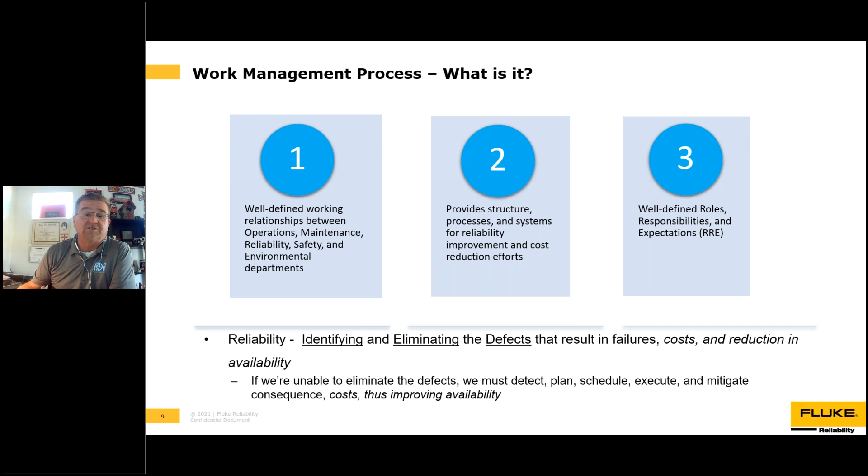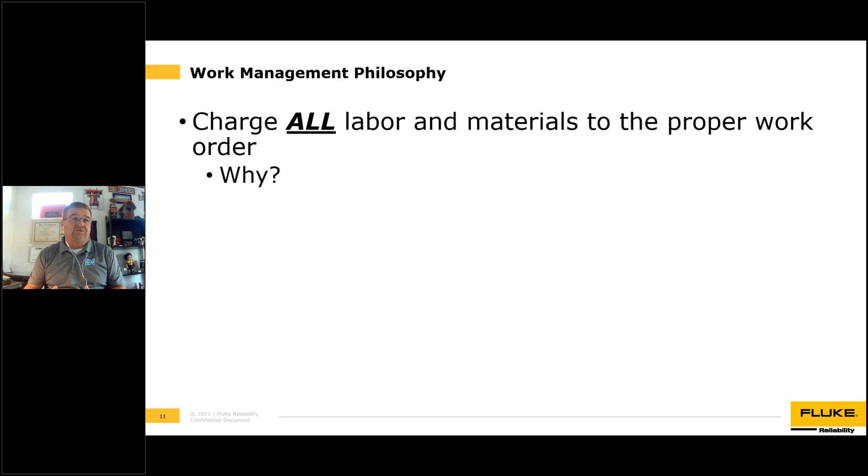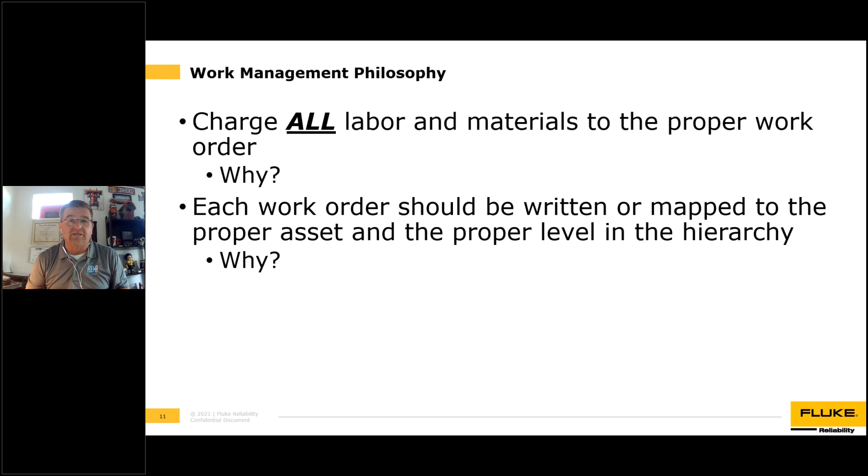What are my costs at each one of those levels? So we want to make sure that we're mapping. In a lot of facilities, and you may see some of this, we don't have a hierarchy, meaning we can't write it down to the motor associated with a particular pump or a component associated with that. We want to be able to do that so we can capture those costs across our facility and for individual parts, so we can see what type of cost. Because again, if you remember one of my first slides, we want to continually drive that cost down.

What are some goals of work management? One of the issues we run into is that in the maintenance world, we're always talking about making sure that things follow a process, that we're planning and scheduling. And a lot of times leadership and operations don't see the value in that. They just want us to show up as maintenance people and fix stuff every day. But we need leadership and operations to see the value in it. So how do we get them to see the value if we don't have a breakdown of our costs?

In order to do that, we've got to be able to provide really good, efficient execution. When we're working on particular things, we've got to make sure that we have everything we need and drive those things together. In most of our facilities, we take a philosophy that says, hey, we want zero injuries.

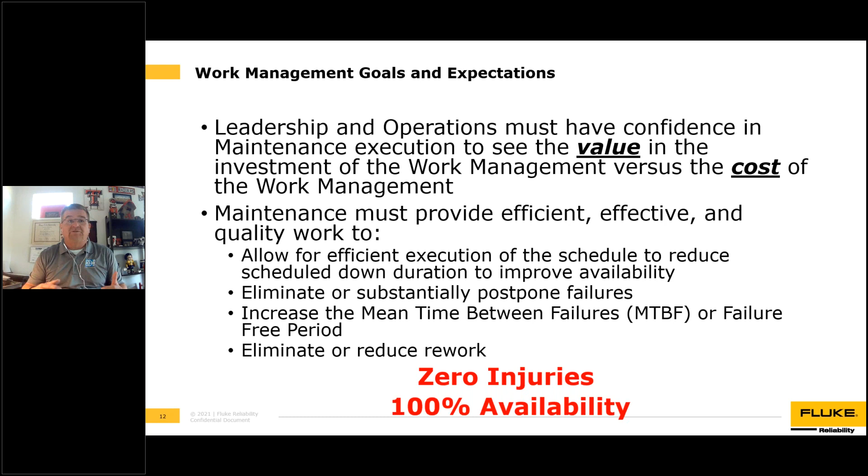Well, from a philosophy standpoint, we want to say we're going to get 100% availability. Just as we use all the same processes and people understand the value of the things we do to move towards a zero injury culture, we need to have the same philosophy around reliability to move to 100% availability. Will we ever get 100% availability? We won't, because we have things that fail randomly. So we want to reduce that time as much as possible. We want to extend the mean time between failures.

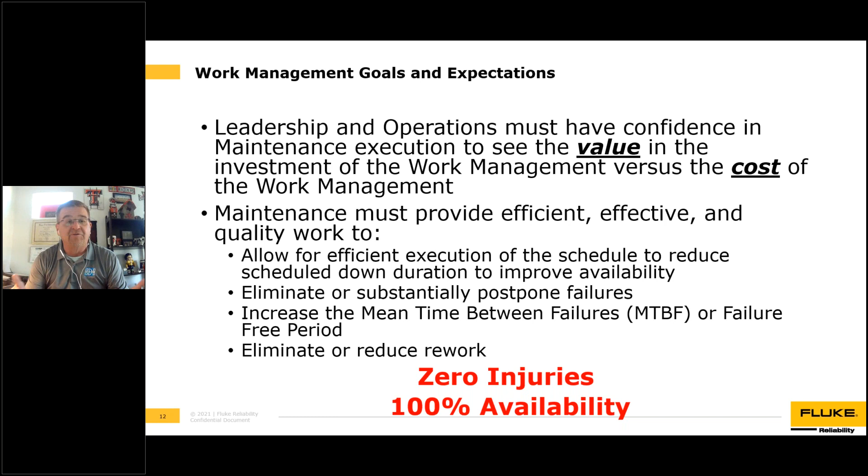And so getting all this data, getting this data collection allows us to do that. So that's really just a high level thing on work management. As you may or may not know, there's a lot of work that goes into work management, a lot of culture change. The piece I want to get into a little bit more here now is about the reliability engineering side of what we're doing.

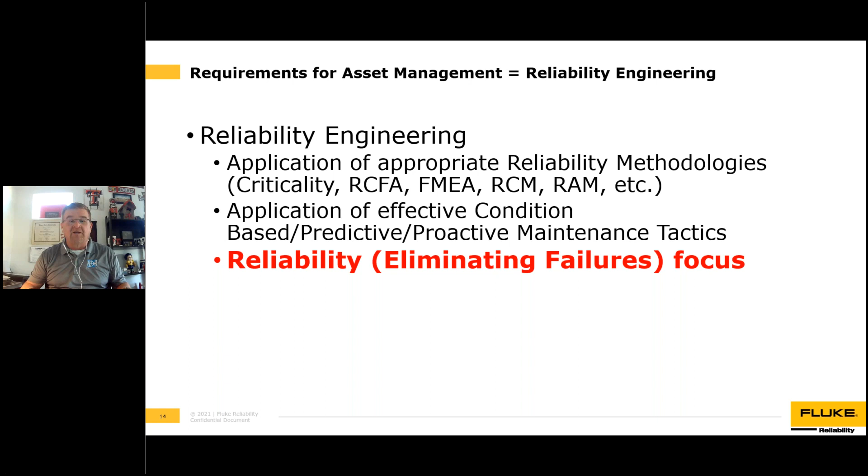But the biggest thing is we got to make sure our reliability engineering group is working on the elimination of failures. Okay, they're not designing platforms. They're not managing the maintenance department. They're not teaching the planners how to plan work. They're eliminating failures. So how can these reliability engineers eliminate failures? There's typically two approaches. Okay, we want to use both of those.

So let's talk about the first one, where we use root cause analysis to understand an unplanned event or an unwanted event. Okay, that falls into the bad actor defect elimination. We'll get into the asset strategies here in a minute, but looking at root cause analysis, think about things failing. How am I going to know? How am I going to follow this? You're probably wondering, how does that apply to data collection? Well, I'm going to show you how that applies.

Okay, so in bad actors or defect elimination, we've got this work management process. We've got people who should be writing their work requests to a certain level in an equipment hierarchy. And we're trying to understand what the cost, the labor, materials, and the production downtime associated with a particular component is. All right. So through that process, we got to make sure that we're writing our work orders and we're capturing that data. Well, how do we do that unless we have a very detailed data collection process? We'll continue to go through that.

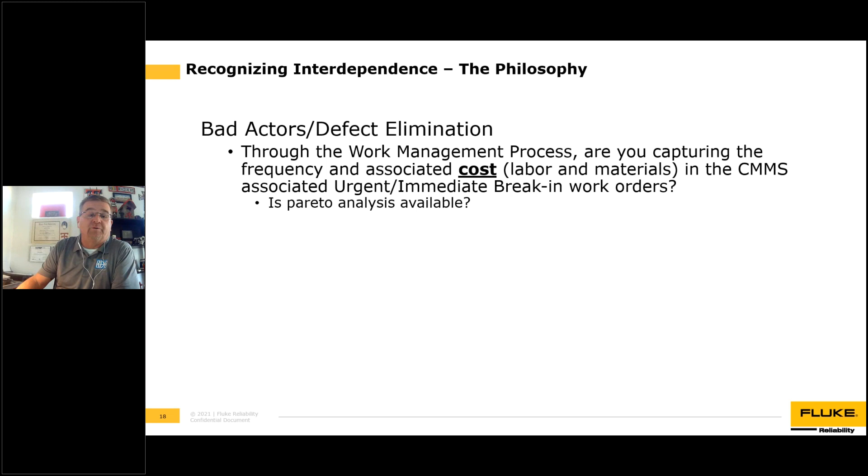Because what we want to do is have a Pareto analysis. Once we have the Pareto analysis, meaning I have certain assets that have certain costs charged to them, and I can write my work order to a certain level, I have data in the system that allows me to take a look at that, and I can present that to leadership, and as a reliability engineering person, I can say, these are the things that are taking us down. Where would you like me to focus my efforts on making the biggest impact to cash flow?

Okay, so you ask yourself when you're going through that, do I have a way that I can break my assets down so that I know what my failures are? I can identify them through the CMMS, and can I present that to leadership so that they can understand what are the things that are taking me down, or where's my highest cost, or what's making the biggest impact to cash flow?

You got to have people. They don't necessarily have to have an engineering degree, but they got to have people who understand how to use the CMMS, how to facilitate root cause, and are they focused in on eliminating the failures? Obviously, no one in the facility wants failures, but we need people whose job that is. Are they focused in on that? And are they trained on formal root cause analysis? So it's not 5 whys. There's PROACT, there's Apollo, there's Think Reliability. They're just more detailed and more structured approaches to root cause analysis.

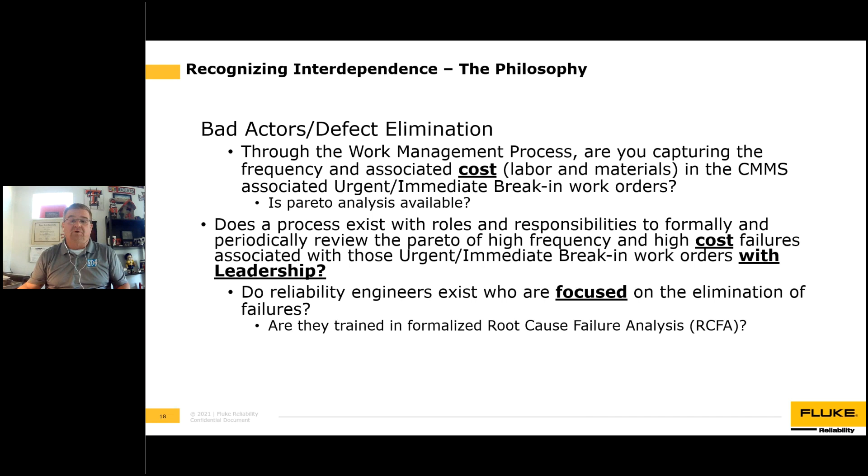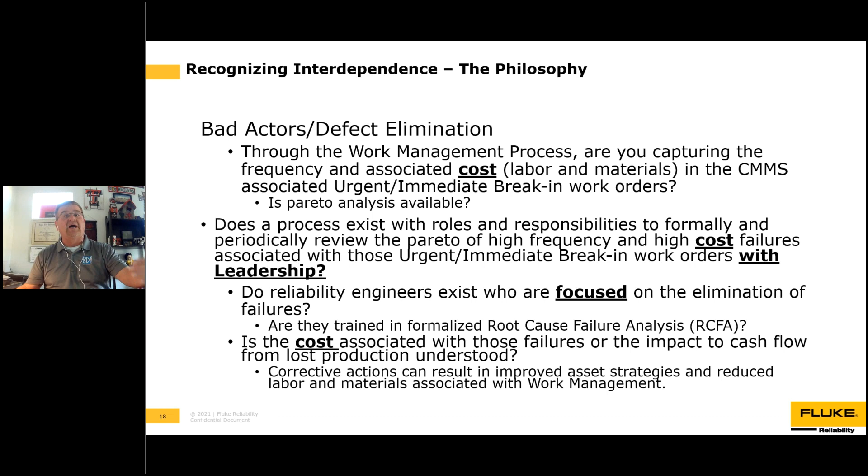Okay, so when they're looking at root cause analysis, they end up coming back to what are the corrective actions that can help us in this particular thing. So again, how does this apply to data collection do's and don'ts? We got to have the data in order to do this. So how do you get the data? This is an example of what I'm talking about.

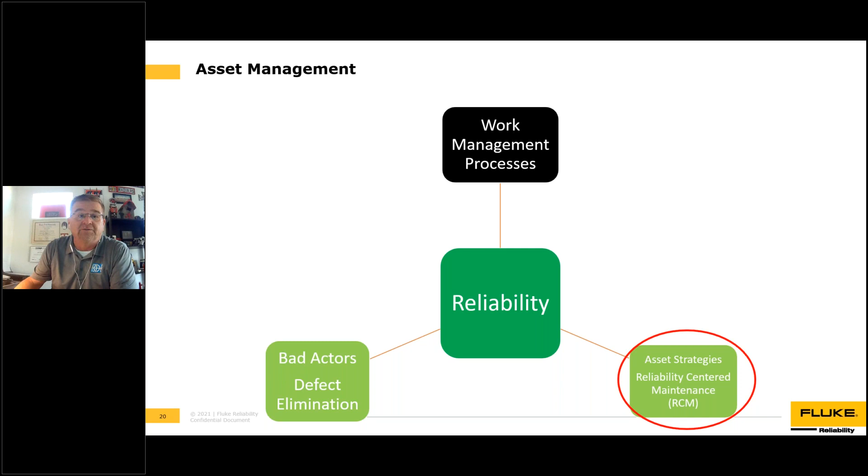Okay, so what are asset strategies? Do you have them? When I talk asset strategies, I'm talking about, do we have preventive maintenance procedures? Do we have condition-based things that we're doing? Are there run-to-failure scenarios or no scheduled maintenance? No scheduled maintenance is really just a better, more positive way to say run-to-failure. And how are those strategies created? Where did they come from?

Did they come from OEM recommendations, which are typically pretty good, but everybody needs to remember, how do OEMs make their money? They make their money on selling equipment, parts, and service. So they have good stuff. And what I mean by that is typically you have a lot of assets out there and you have a lot of spare parts. Well, if your asset, you push the button, it runs forever, how much money is the vendor going to be making on that? Meaning he's not selling you parts, he's not selling you service.

So OEM, I'm not down talking the OEM recommendations, they're good, but typically they're trying to sell you parts and service, and that's my personal philosophy on some of that. How else were they created? Were they created based on failures that we've seen, failure modes and effects analysis? Are there best practices? There are certain best practices out there for rotating equipment, for fixed equipment, for electrical equipment.

Sometimes we have PMs out there that are not value added because they were created because someone got upset because something failed. I have examples in my career where we were inspecting things because of an incident. We didn't get the root cause. They're not value added PMs. When you're building these PMs and these asset strategies, understand they need to be something that prevents a failure, or substantially postpones it. Or were they created the right way, which is through reliability-centered maintenance?

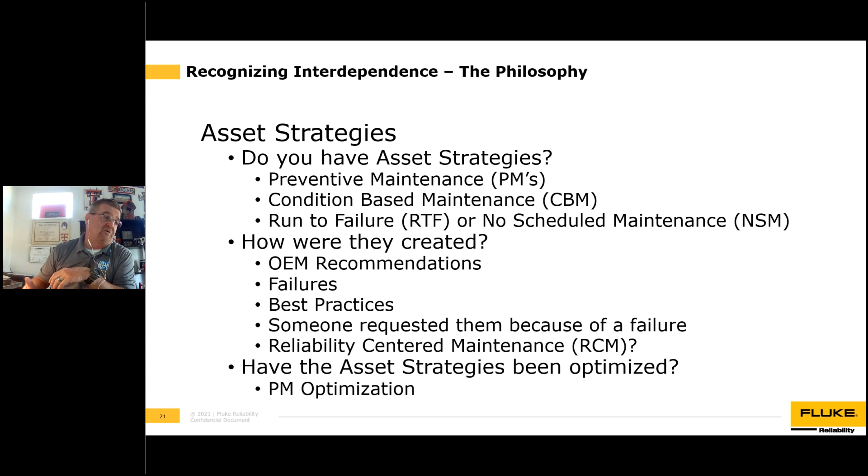If you have PMs out there existing, have those strategies been optimized through PM optimization? So there's a process that says, hey, are we looking at these PMs? Do they substantially postpone a failure? Do we have the right people working on it? Is there a better way to do it? Can we do some condition-based maintenance, things like that?

Because if you go to a typical facility, doesn't matter if it's a mine, a plant, in whatever industry, what I typically find is they have some asset strategies. What you'll see over here on the left is there's some condition-based, some vibration analysis going on, some analysis going on. You have some OEM type of things that have come in, but a lot of the times there's nothing going on.

So the drive is by doing this, and again, you've got to have the right data in the system. I'll get back to data collection here in a second. I'm showing you the background of why you need good data collection. You want to drive in the direction that says, hey, I have more condition-based. Not everything can be condition-based. I want to drive down my preventive maintenance because typically preventive maintenance is done during downtime situations. So we want to keep the thing running.

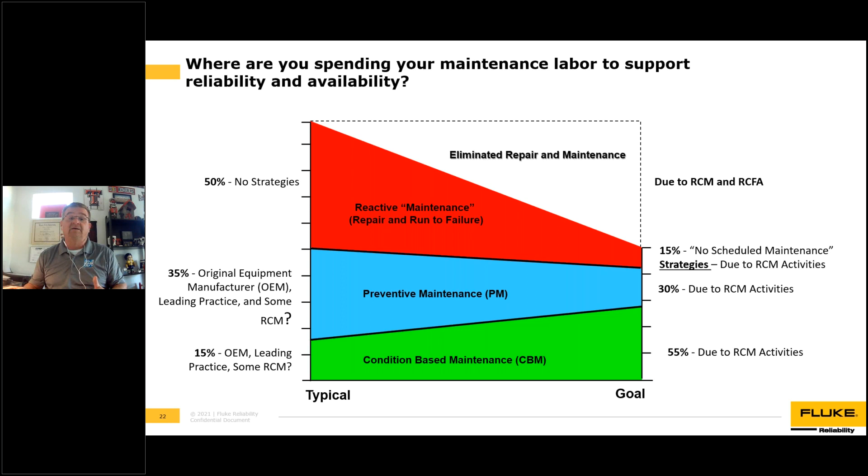And then some things we want to get to no scheduled maintenance, which is these things, they're like a maintenance-free battery. They run forever. So we're trying to drive from the left to the right, and how do we develop these asset strategies? And the way we do that is through RCM.

Asset strategies, just to be very practical, these are the type of asset strategies we're talking about. No scheduled maintenance. We don't replace windows. We don't do PMs on windows. If they get broken, we replace them. Headlights the same way. There's things that go on in an engine that we want to do. We're checking the oil. So that's a little bit more usage-based and condition-based. Same thing on brakes, okay?

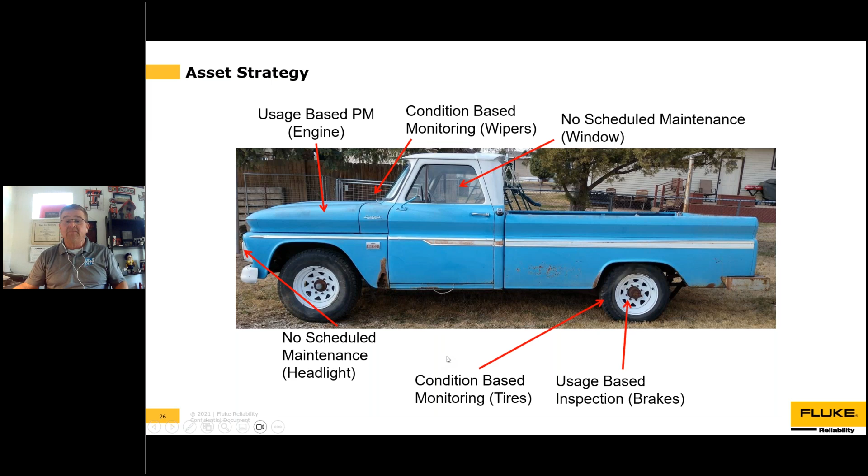Condition monitoring or condition-based, looking at the windshield wipers. When we change them, we start to see that they're cracking. Same thing on tires. We're measuring the depth of those kind of things. Failure finding, we're checking the exhaust. Is it too smoky? Things like this. So these are things that relate to asset strategies.

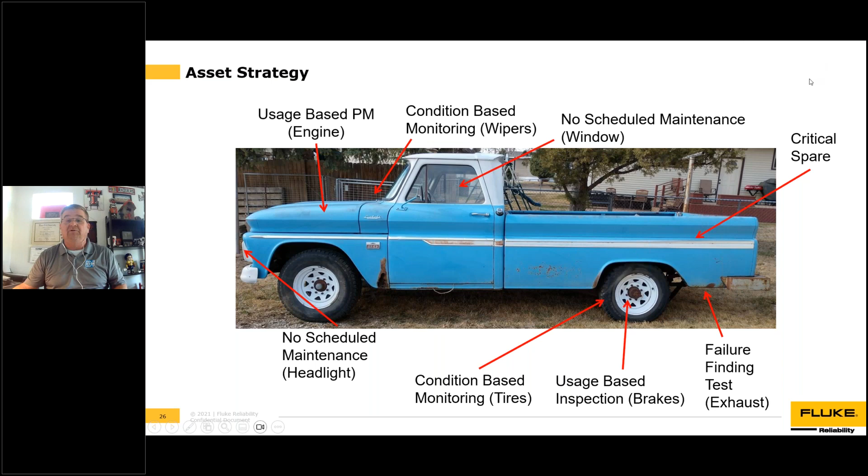And then we have the spare situation. So why don't we have 4 spares on a vehicle? Because over time we've decided one's enough, because we can't predict these failures, right? But if you're going on a long trip and the conditions say there's nowhere to pull over, maybe you're going to end up having 4 spares. I'm just trying to give some examples of the asset strategies that I'm talking about.

I talked a little bit about PM optimization. You have existing PMs. You're not going to start from scratch. You're going to review these things. When I do PM optimization, I'm looking for certain words. If it says sample or inspect, what are the details associated with that? Does this PM substantially postpone or eliminate a failure? Okay, so this is part of the PM optimization process.

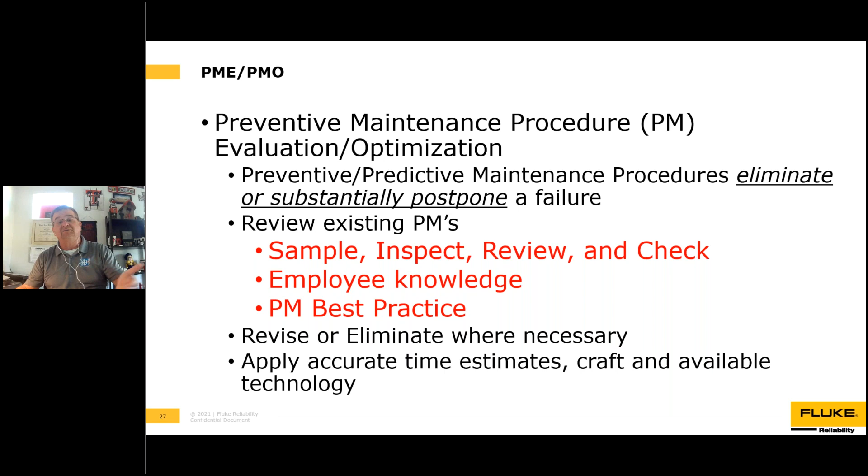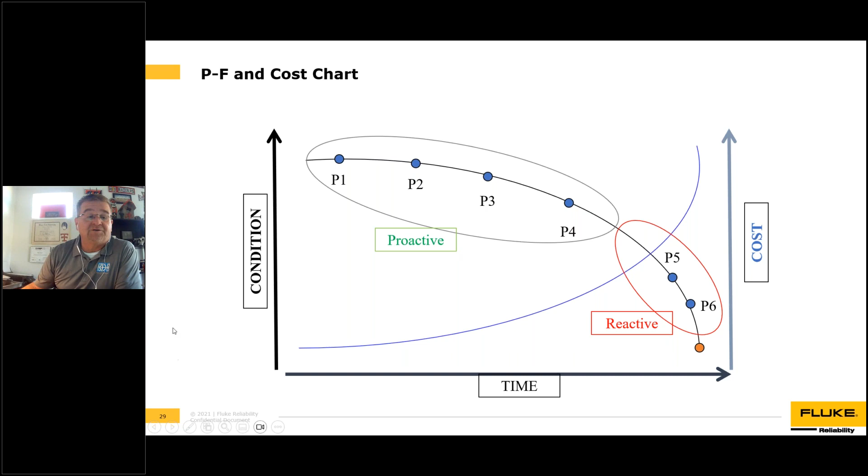And what we do is we revise those, and we make sure we're trying to drive the cost down and keep our equipment running so that we don't shut it down unnecessarily, but we're also doing things that prevent failures and not just emotional type things. Because again, we're trying to back up this curve. Just something more on this curve: as we slide down the curve over time, we've learned over the years that the cost goes up. You're going to have higher cost over time with more failures. So just something to remember.

So as we get into RCM, now we're going to get into a little bit of the data collection. So how does this data collection, that this whole webinar is about, relate? Why are you talking about RCM?

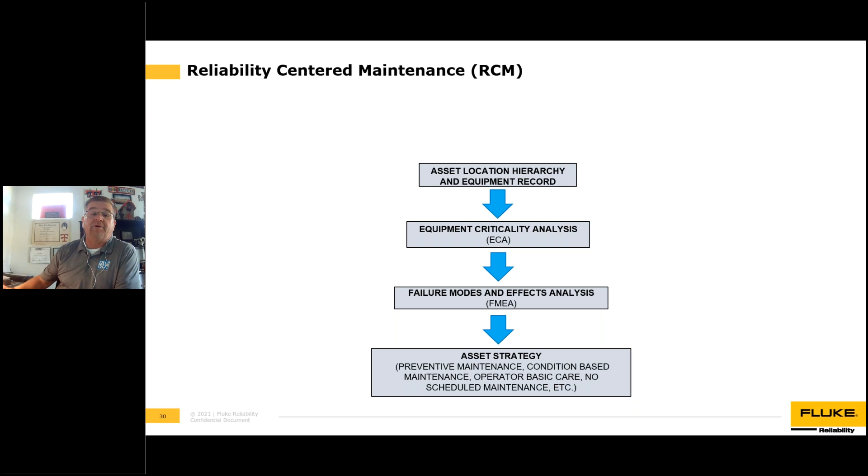Like that's reliability. Well, the reason is because we've got to start out. In many places, I'm on a project right now where we don't have a master equipment list because no one's gone through and done it. And inside an existing facility, we don't have any data. We can go to the work order system, the CMMS, we can go look up a part or an asset, and it has no information, right?

So operators out in the field, when they write a work request, when something's going on, they're writing it to the plant level, all right? So we've got to have a master equipment list. You've got to create that master equipment list in order to get to the bottom where we're going to create this asset strategy. So that's how this ties in.

And then you've got to define a hierarchy, okay? So what's the hierarchy? If I have a pump, do I just write the work order to the pump, or what if I'm having motor failures, or gearbox failures, or pump wear or something? What we're trying to do is figure out what is the right level that we want to create in the data in the master equipment list as far as hierarchy goes.

And typically we're looking at the facility, a section, equipment class, and we want to be writing our work orders and creating our hierarchy down to the component or maintainable item. After that, we have parts. That's really more of a bill of materials thing. We'll talk about that a little bit. But this is really an ISO standard that we use. And this is part of this data collection process. How do we create this hierarchy?

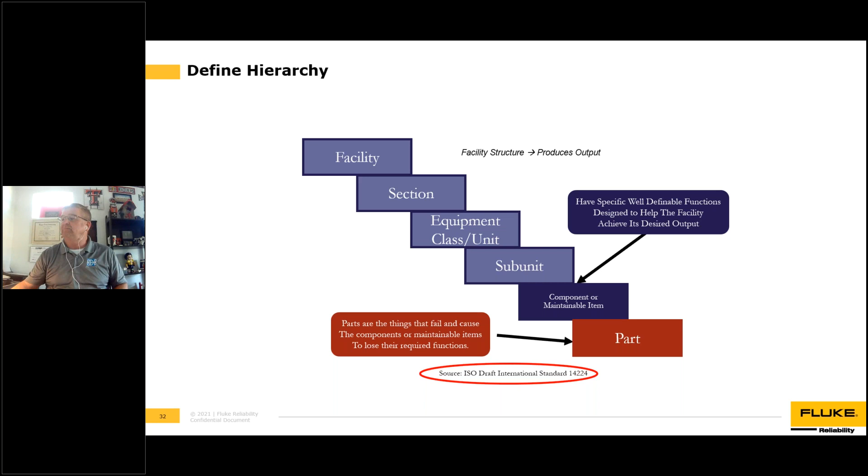Once we've got the hierarchy, then we want to do our equipment criticality analysis. So it's a process of determining what is our most critical asset so that we spend our time creating these asset strategies I talked about. We spend our reliability engineering time, and also our operating and maintenance time, to develop these asset strategies based on the criticality assessment. And these criticality assessments, I'll show here in a minute, force rank these things based on a common failure or a most frequent failure.

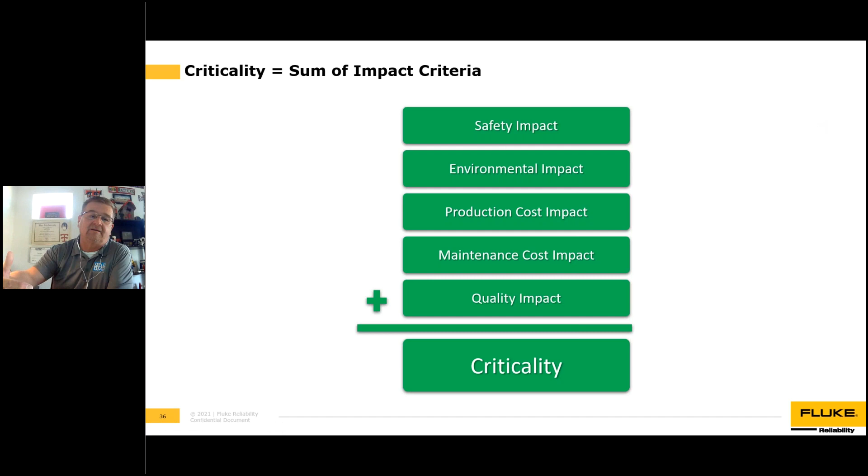So what we do is identify the most common failure. What are the failures? How does that impact the business? But again, we've got to start with our assets. So we've got to have good data. In some cases, we don't have any data in our CMMS. So we've got to go to a P&ID. We've got to fill this thing out. So getting good data initially is good. And what we end up with as a result of that is a criticality. But again, the issue is how do I go about doing this if I don't have good data in my system.

Once we get into that, then we need to break the equipment down into components. So if I have a pump, I want to break this down to my hierarchy: the pump, gearbox, motor, and I need to do my failure modes and effects analysis on those. So how do each one of those things fail, and how do I prevent those? If you don't have the hierarchy built into your CMMS, how are you going to go about doing that? It's a lot of work to get there.

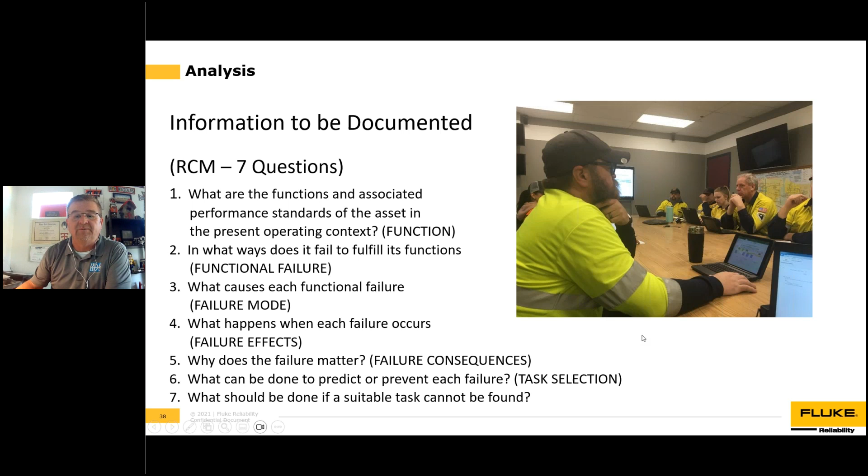Once we get there, this is the part I was talking about. Once we're looking through the failure modes and effects analysis, this is the big part of the RCM, and how do we eliminate that? We've got to have this in our system to be able to do that. Then we're going to get to the asset strategy. What are the strategies we have to eliminate or substantially postpone those failures?

And those are preventive and condition-based and things like that. So once we have all this in the system and we create our asset strategies, how do we effectively enable ourselves to capture history and cost to effectively manage the assets? Well, we said we've got to have an equipment list. We started out with that.

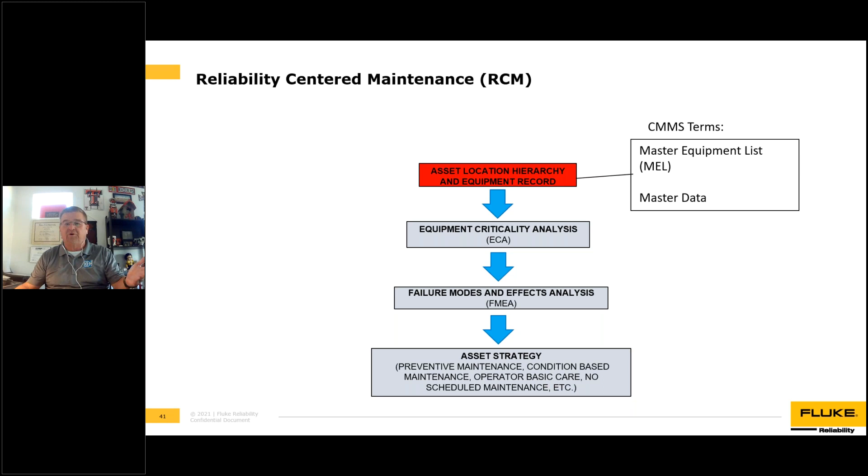So what's the purpose? We want a facility where we have agreed-to designs, processes, and guidelines for building that. So you start out and say, what level are we going to build this hierarchy at in the facility? And you've got to have that master equipment list. And then after that, you've got to have the master data. So what is that? This is a way to provide a documented starting point for continuous improvement.

So once we have our hierarchy built the way we want it, and we have the data associated with each one of those, the specifications for the pump, the motor, the gearbox, and so on, that gives us a way to start looking at where failures are happening and what the costs associated with that are.

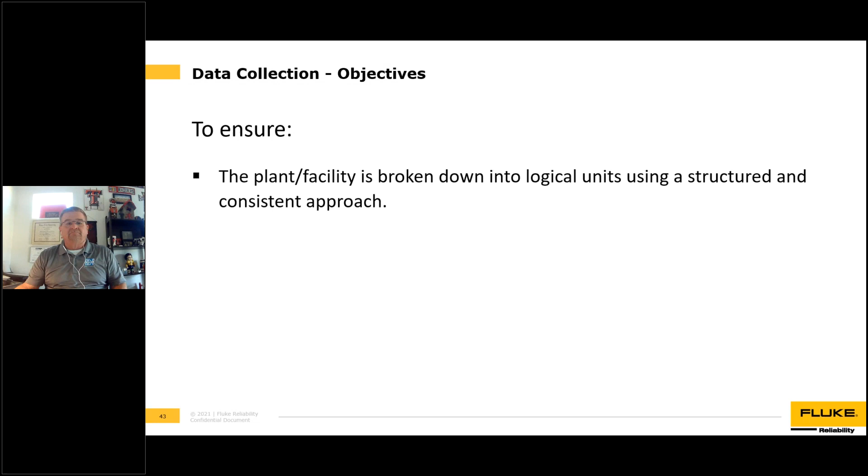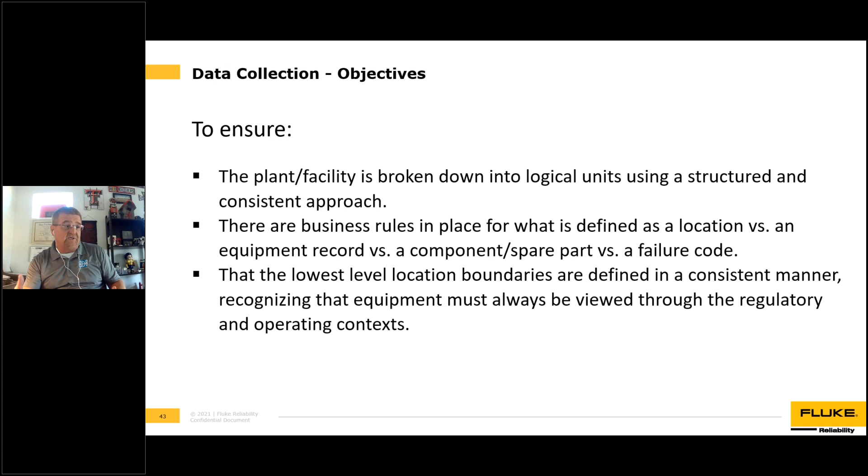So what you've got to get into is utilizing those processes and that hierarchy. What's a location? What's an equipment record? Like I was talking about before, is it a component? Is it a spare part? And you want to get to the lowest level you're defining, such that you can write those work orders to the lowest level that meets what you need to do from a business standpoint. You need to be able to create that and have that.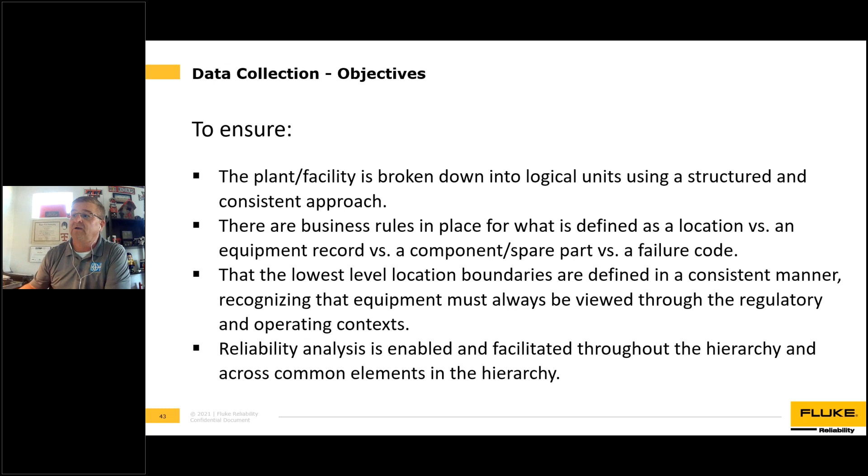That way, the reliability engineer can do what he needs to do, so he's not having to go through and find keywords in work orders and things like this. If we have failure codes, we know what level we're writing the work order to, and we have all that data built into your CMMS, then the reliability engineer can do a better job at figuring out what the issues are.

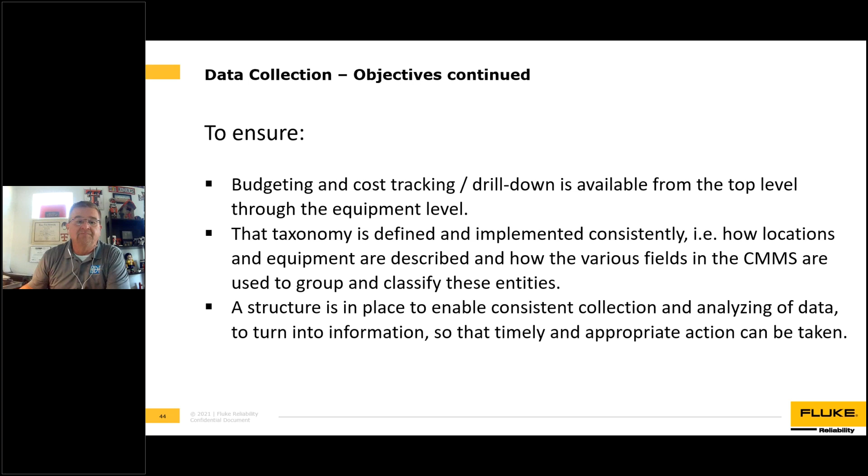So the first thing you want to do is establish that standard for hierarchy in a parent-child relationship, meaning taking that little pyramid and saying, I want to be at the lowest maintainable level. For example, are we going to break a pump down into motor, gearbox, coupling, and pump? Or are you just going to say pump when you're breaking down your hierarchy? So establish something and be consistent about it. Ensure all those things are linked.

Establish the hierarchy order the same. Like I said, if the first thing is pump skid, then it's pump, and below that is your motor and your gearbox. Make sure it looks like a tree. Really, you want to start up at plant, and then go to area, location, and so on. But make sure you have a consistent way of doing that.

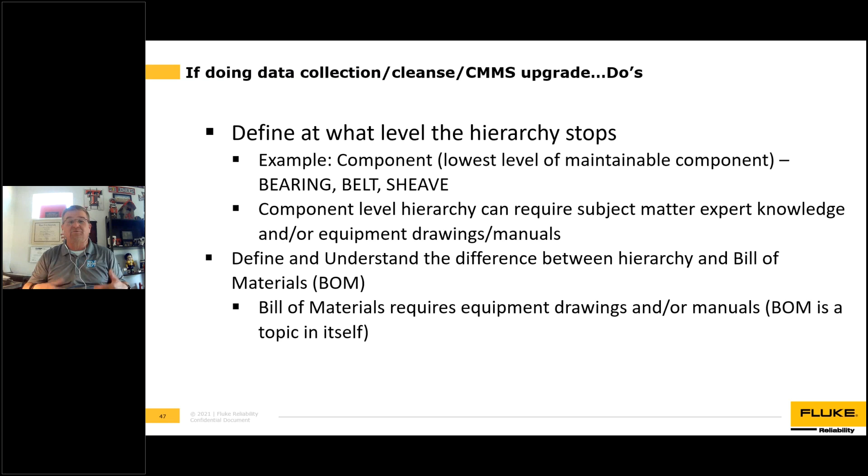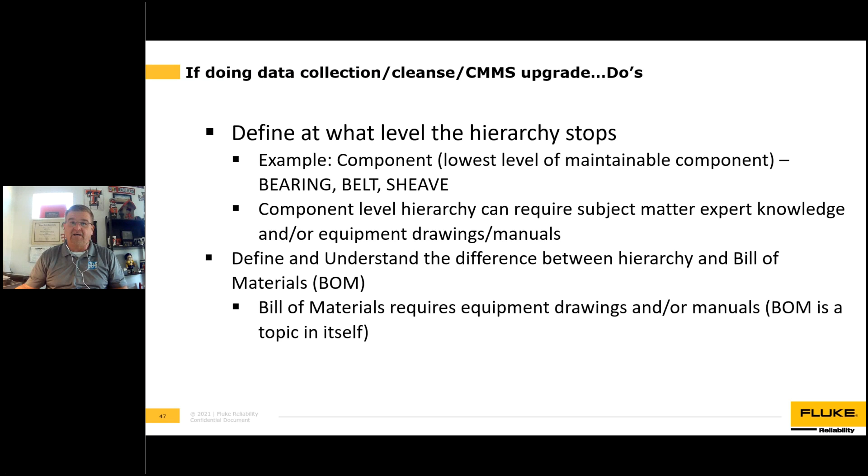But it takes a lot of work to do this. That's why typically you don't see people doing this, because it takes a lot of labor and a lot of effort. But depending on your business, that's why I was giving that background. If you have that level of detail, it allows you to drive continuous improvement. When you're writing work orders at the higher level in the hierarchy, at the plant level, the area level, the unit level, you just can't get into the details. You waste a lot of time trying to find out what your issues are and having the data to eliminate failures.

Couple more do's. If you don't have any of that, these plants, these facilities were built utilizing P&IDs or process flow diagrams. You can build a pretty decent hierarchy just by following a P&ID. I actually have a couple of individuals doing this right now for a plant that's actually being built. So we're taking the P&IDs, we're doing what I call a virtual walk down. They're just following the flow as they come to a component.

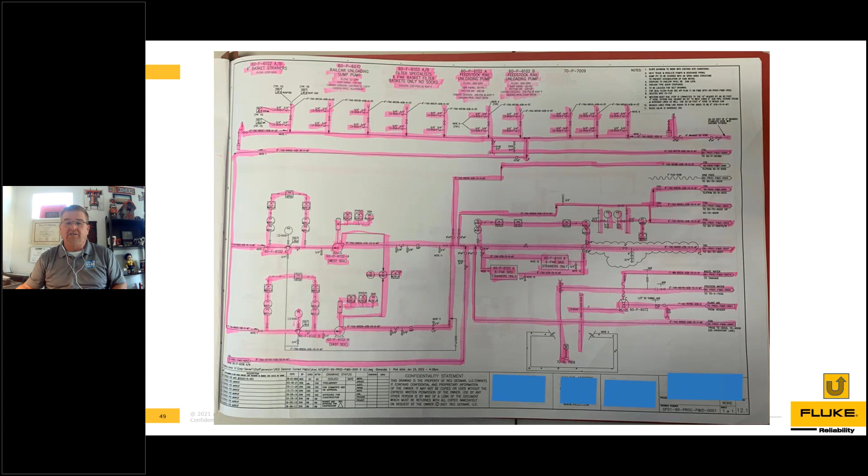These guys are ex-planners. They'll go through, they'll come to something, they'll say, okay, this is a centrifugal pump. So they break it down like I've been going through. We capture all the data, right? We go into the engineering system and capture the information, like for a pump. What's the motor size? What's the horsepower? Anything we need from a maintenance standpoint. We're doing it virtually, because the plant hasn't even been built yet. So we're capturing all that information and putting it into an upload sheet so that it can end up in this CMMS.

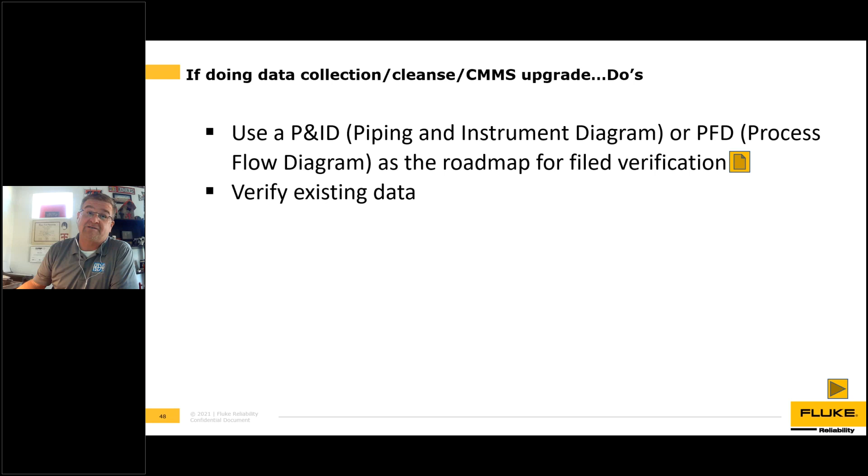Got to verify it, right? So the best way, if you do have an existing plant, is take that P&ID, walk it down, verify that what you have on the drawing is what you have. If you have something in your existing CMMS, just make sure that it's what it is, because it's going to be used in the future. That's what I was talking about before. Collect all those asset class attributes.

So if you're thinking about this, you can think about how much labor and time it takes. And probably if you're in a place that has a CMMS that doesn't have a lot of data, it's because either someone didn't know it was going to take a lot of time, or it just wasn't something they wanted to pay for at the time. But I tend to see a lot that these CMMSs have hardly any data in there for anybody to do any continuous improvement.

When you're collecting this data, do a three-way match. Take the P&ID, check it to the field tag, what's in the CMMS, what's in your engineering file. Make sure that what you have in your CMMS is exactly what you have on the drawings. One or the other may need to be updated. You may need to get with drafting so they can modify the P&ID to match your CMMS, right? Sometimes, in some locations, it takes a little bit of negotiation to get that done. But you're trying to verify a minimum three-way match.

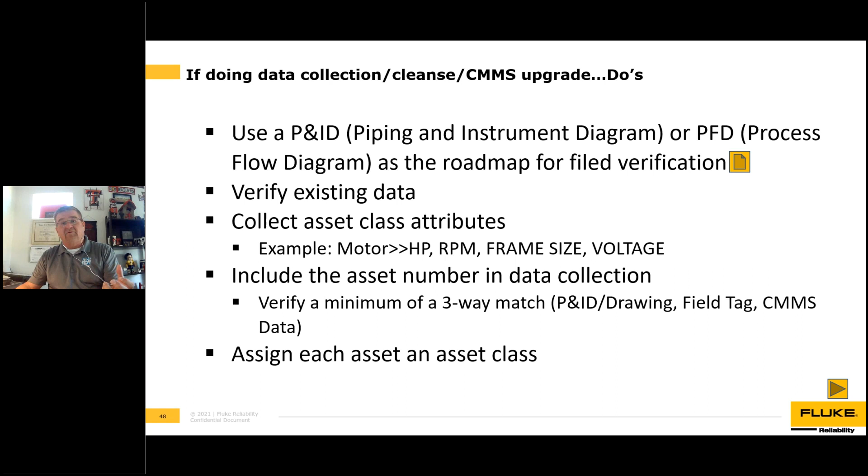So if everyone understands the value, which is the first part of what I was trying to give in this presentation, then we understand why we want to make the investment to make sure that we're capturing this data. And then assign each asset an asset class. An asset class would be a certain type of equipment. Are we talking about rotating equipment? Are we talking about fixed?

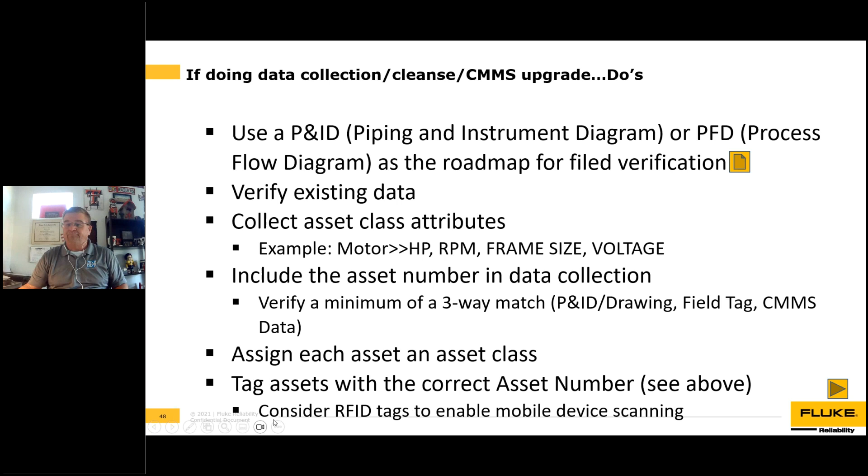And you can even take that a level down. If you're going down, you're walking down with the P&ID and you're just following the flow. One of the good things that you can do that helps with good data collection, and also good from a future standpoint, is we tag the assets with the correct asset number. So if you're looking at the P&ID, a P&ID typically has a tag. If it doesn't, you need to create a tag, tag being some kind of an asset number.

Then we want to tag it in the field so that we can find these things in the field when we send a technician or a craftsman out there to do work. So we want to make sure that we've got all our boxes checked. We said our P&ID is correct. We have a tag in the field so that we can find it. In some places, they're even using RFID tags so that they can go through and take the tag number with a gun, and they know exactly that they got the right tag number. It's in the system, so on and so forth. But you want to make sure, at least from a manual standpoint, that everything is matching up and you make it as simple as possible to find those things.

Because again, we talk about work management. Why we're doing this: we're trying to improve the cost. We're trying to improve the productivity of the workforce. We're trying to reduce the downtime so that when we go out there and work on a piece of equipment, we're not wasting time trying to find it. We're there, we execute the work. The work's already been planned, scheduled, executed. That's this three-pronged approach I was showing you guys. That's how that all fits in together. Okay.

Another do is, you can have all this stuff, but you've got to make sure that it's mapped correctly in accounting so that all of the data and all of the information, the cost data, the materials and labor, is going to that particular work order that rolls up to the asset, that rolls up to the GL account or the accounting system, so that you can provide the right information to your leadership about what kind of money you're spending, what opportunities you need to invest more capital in, and things like that. So you've got to have accounting involved in some of this as well.

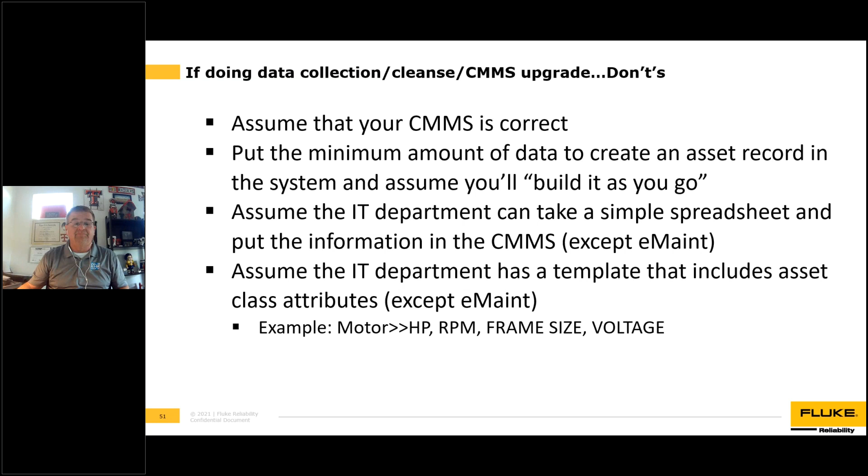Okay, let's get into some of the don'ts. Some of the don'ts when you're getting to this point of getting data: just don't assume that your CMMS is correct. And probably nobody does that, but sometimes people outside of maintenance, in operations and leadership, may make that assumption and may be new to the facility. And your CMMS is not correct, right? You haven't gone through all this detailed data collection process. So don't ever assume what's in there is correct.

Don't put the minimum amount of data in. That typically happens due to resource constraints, and then, oh, we're going to build it as we go. So we're going to create a bill of materials. We're going to create an asset. We put in pump, and we just put one asset tag in there. Don't think you're going to do this as you go, okay? It's going to be something that you're going to have a campaign to do. It's like, hey, we understand the business case. The business case is all that information I gave in the beginning of this presentation.

And we want to be able to capture data for continuous improvement. Pick an area, go through that. That's why you want to do this criticality analysis. Where do I want to spend my time doing this? Okay. And then actually go through and create that whole process. Get that data. Don't think you're going to build it as you go. You're never going to have the time because, as you well know, for everybody that works in a facility, there's always going to be something else coming up.

This is a huge one. Don't assume the IT department can take some simple spreadsheet that you give them and put the information in the CMMS. Now, eMaint, which is part of Fluke, can give you a spreadsheet that you can populate, and it tells you exactly what you need to populate so that it can be uploaded. But the IT department is not going to be able to give you that. That's not very typical.